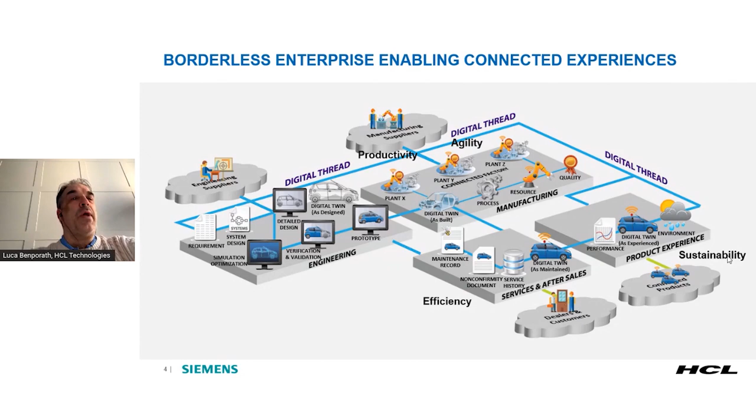When we deep dive into the engineering, there is one additional challenge: to have a full convergence between three main components of a product, which are the mechanical engineering, the software engineering, and electric design. All these three have typically been managed in silos, and our aim is really to start the convergence because, of course, one product has different viewpoints.

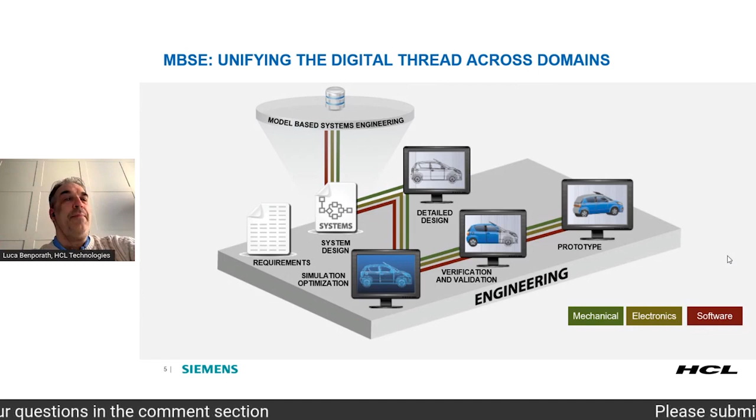And what you will see during this webinar is how in HCL we concretely help our customers move into that consolidation and harmonization with the right mix of competences, software, IP solutions, and best practices that are helping our customers go for this convergence of software, electronics, and mechanical. If we move to the next slide. So this was really the high-level picture.

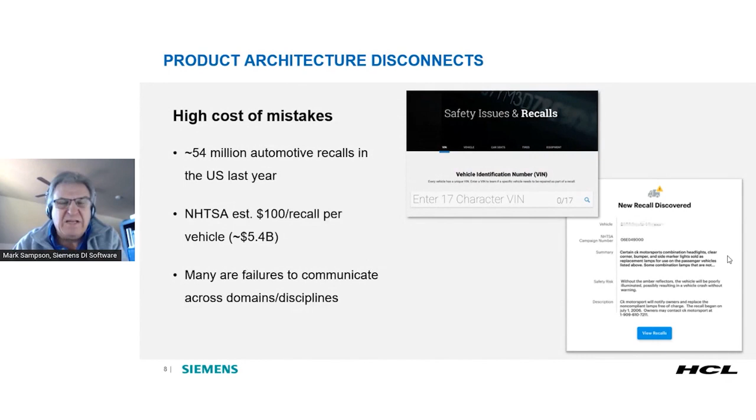Going on to the next slide. So what we're after here is this is a symptom of organizations and disciplines and complex system interactions that are all attempting to communicate in disconnected ways. So today, without this digital thread in your organization, the discipline boundaries and organizational boundaries create these barriers to communications that result in engineering problems across those boundaries.

For example, a requirement change on one side of the barrier isn't communicated to the other side, and so we have a problem. So the later we discover those lost communications, the more expensive it gets. But of course, you already know all this. In fact, you set aside half your program schedules in complex systems to deal with these kinds of integration problems. On the next slide, please.

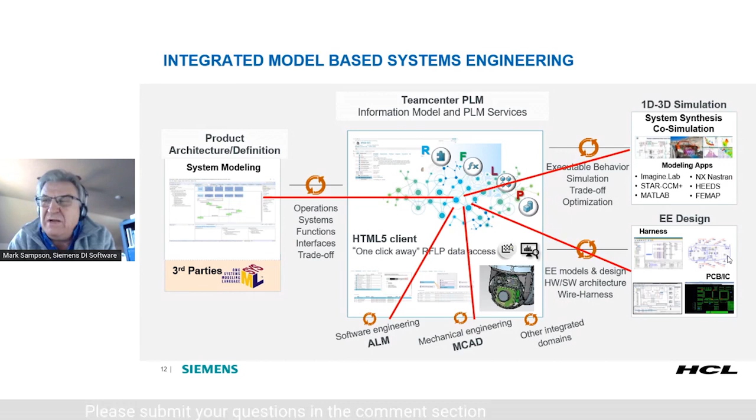Hello, this is Ambar Gadkari, and I'll walk you through some of the approaches that we have been developing on integrating MBSE with the rest of the product lifecycle.

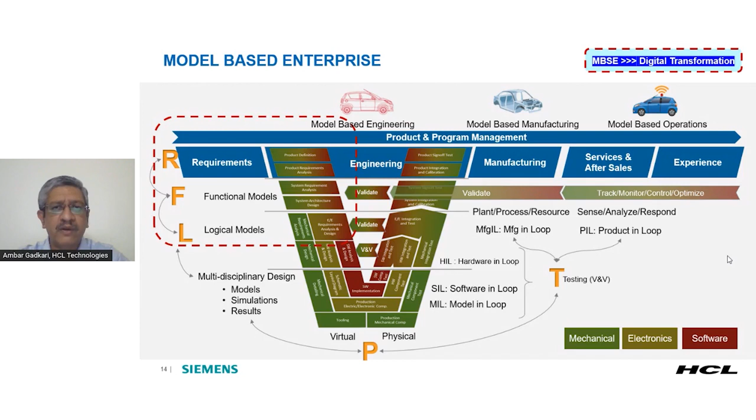So as mentioned by Luca and Mark, modern products as well as the product development lifecycle are getting more and more multidisciplinary in nature. By multidisciplinary, we mean a very tight integration of software with the electronics and the electrical and the mechanical parts that are inherently there in modern products, including cars and aeroplanes and many other

products. As you can see in this picture, there is not just one single V cycle in the engineering development activities, but multiple Vs being worked on in parallel. So the approach of MBSE or model-based systems engineering, which is applied at the top left-hand side corner of the V, is the approach being adopted by most organizations in handling the complexities introduced by the multidisciplinary nature of engineering processes.

It all starts with requirements, gets down into the functional, logical breakdown of the requirements, and then continues to the detailed design and the physical implementation of the systems. And then the traceability also continues in the various testing activities on the right-hand side of the V, as you can see. The need is also arising to create traceability not just in the engineering silo, but going beyond engineering into manufacturing and even aftermarket. And that is all met by bringing in the model-based nature in the engineering and development processes right at the beginning at the requirements level.

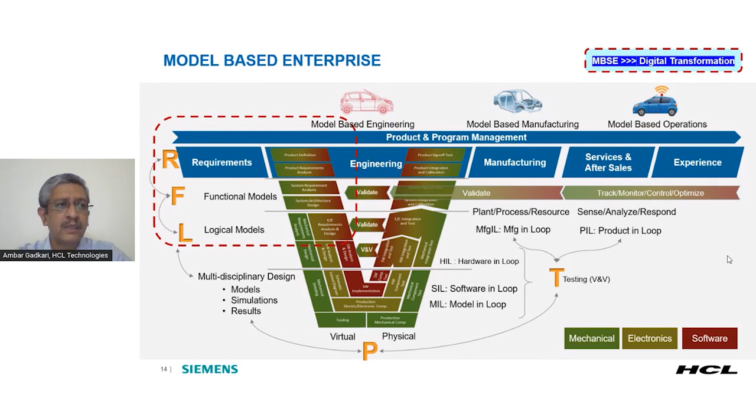Going to the next slide. So let's look at how this is achieved. As you might be aware, many of the engineering processes, be it mechanical or electrical or electronics, have their lifecycle or workflows handled by product lifecycle management or PLM tools, while the software, which is a newer entity in this entire product development, is handled by application lifecycle management or ALM tools.

So PLM and ALM together cover most of the activities related to the design, development, and testing of these products. However, bringing in the model-based approach at the requirements level requires bringing in MBSE at an early stage, before the detailed design activities start. And that's where newer tools like Cameo Systems Modeler and Rhapsody are being looked at, and systems modeling languages like SysML are being adopted very rapidly.

And the need seen by the industry is how do we create seamless workflows so that MBSE tools and processes get adopted in the mainstream product development lifecycle seamlessly. And that is what we will talk about in the next few minutes of this webinar. We can go to the next slide, please.

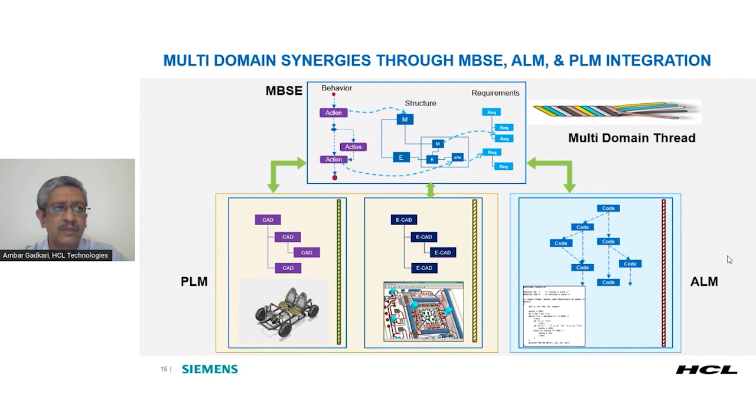At HCL, we have this dedicated R&D unit, which we call the Systems and Software Lifecycle Management COE, or in short, SysLM COE, which focuses on developing solutions for integrations across ALM, PLM, and MBSE tools. Through our 360-degree partnerships with various tool vendors, we have been able to develop various solutions, and one of them, which you see on the screen, is MODEX. MODEX is short for Model Exchange Solution. It is a data exchange solution for system modeling activities carried out as part of the MBSE block that you see there.

MODEX comprises not only the connectors, but also consulting and services associated with them. It uses pre-built tool-to-tool connectors for connecting MBSE tools with the various product lifecycle tools, such as requirements management tools and detailed design tools. This is required in realizing various use cases, such as automatically importing requirements from requirements management tools, like ALM or PLM tools, into the SysML format. That is one kind of use case handled by MODEX.

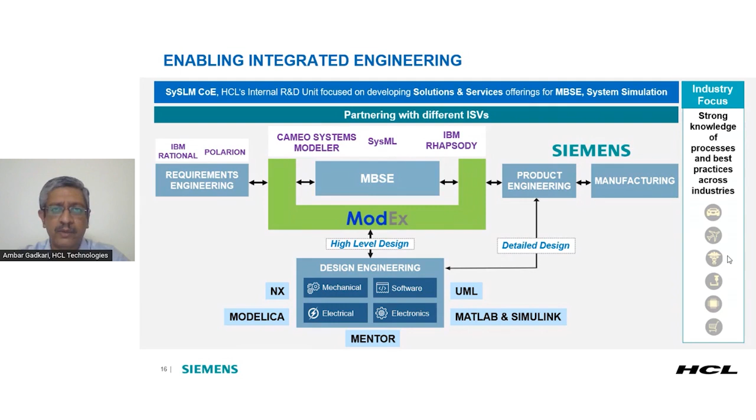So over to you, Hemant. Please, you can take over. Thank you.

Yeah, thanks, Ambar. So, as Ambar talked about integration of MBSE and PLM, as a part of HCL's offering of ModEx, we developed a connector to integrate Cameo Systems Modeler with Teamcenter. This solution is developed in partnership with Dassault Systèmes and Siemens. This connector delivers the capability to integrate system modeling data and artifacts from Cameo with Team Center, ensuring the downstream connectivity of data and bidirectional traceability across these tools.

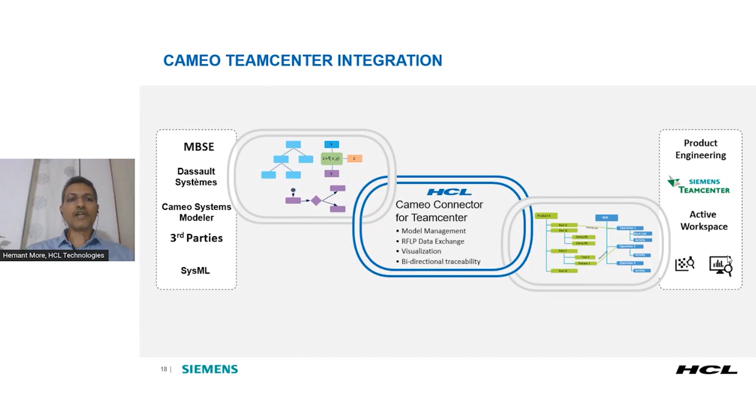In the next slide, I will talk about some of the capabilities and features of this connector and also show you a small demonstration. Can you move to the next slide, please? Yeah. So this integration, which is already available in the market, supports some of the major use cases. I will explain them briefly here, and then we can see them in the demonstration.

One of the key use cases is model management. This is about sharing the system model with Team Center and saving it in the Team Center repository, performing change management operations like check-in, check-out, revise, and other similar operations. This is not only the file, but we can store diagrams as images so that users can get the system information in downstream workflows.

The next use case is requirement integration, which is about exporting them to Team Center and using them in the PLM domain. At the same time, users can drag and drop some of the requirements from Team Center to the appropriate location on the project model in Cameo. During these operations, the SysML model is created as per the default mapping. Most of the primary types are supported using this default mapping. The next key use case is bidirectional data synchronization between Cameo and Team Center, keeping the traceability throughout the life cycle of the product.

Josh is the system architect. His role is to understand the requirements and formulate the system architecture using an MBSE tool. His team of system engineers, David and Sarah, works on further granularizing the MBSE specifications using a suitable methodology. Josh has chosen Cameo Systems Modeler to develop the adaptive cruise control system using SysML.

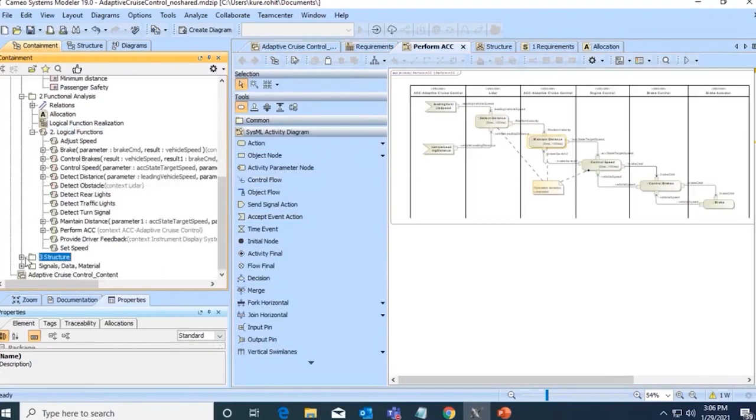The top-down method of system modeling begins with mission requirements, high-level functional decomposition, and logical modeling, ensuring traceability with appropriate relationships, for example, satisfy, allocation, refine. This model is shared with David by exporting it to Teamcenter.

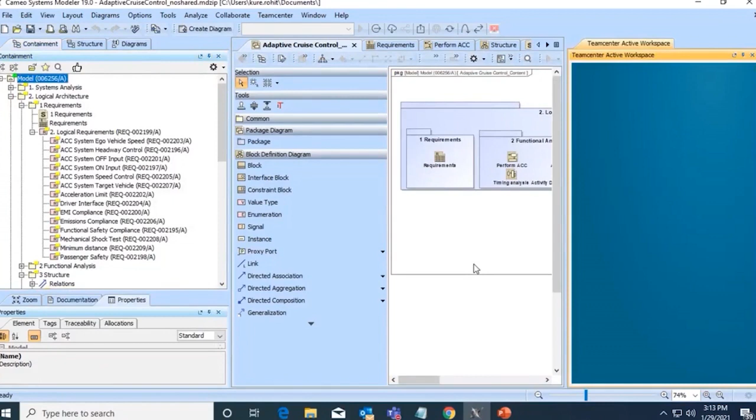On successful export, the ACC model is transported to Teamcenter objects as per predefined mapping rules. The corresponding Teamcenter ID and revision properties are updated on Cameo model elements for Teamcenter model management. The feature of visualizing this model in the embedded Active Workspace will help in quick review of model elements transported to Teamcenter.

David imports this model and performs further modifications to add more details. He first revises this model from the Cameo UI to incorporate modifications. By using a drag and drop feature, David brings the newly added requirements for obstruction detection from Teamcenter to Cameo. David creates a new camera block to satisfy the new requirement of obstruction detection.

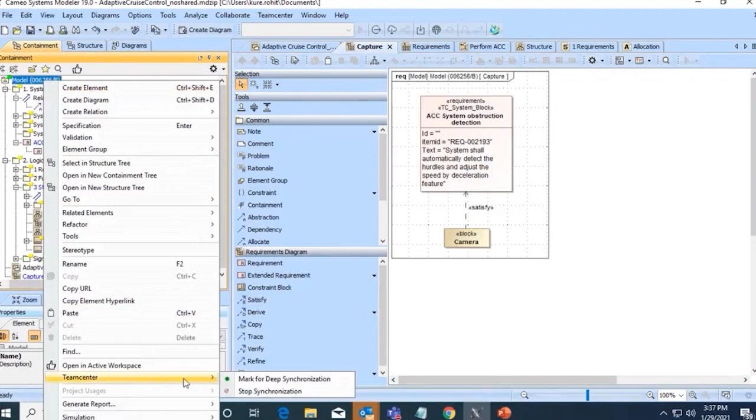Once his modifications are complete, he quickly publishes this back to Teamcenter using the selective synchronization option. He checks in this model to make it available for Sarah to implement her design details. Sarah verifies the changes by David in the Active Workspace web client. However, Sarah also wants to merge her offline work. She uses the sync and merge feature to push her modifications to the SysML model.

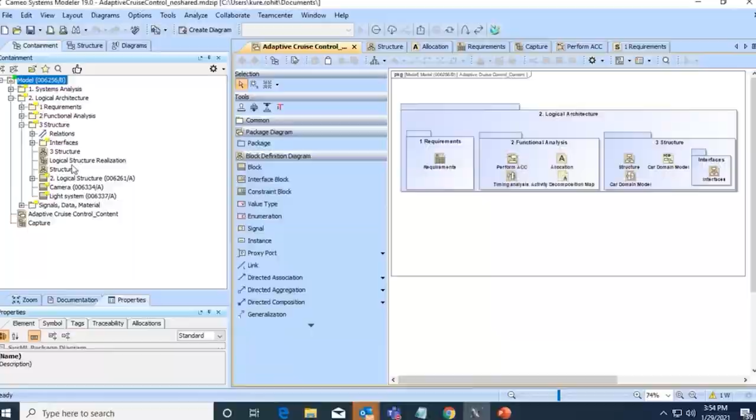HCL's Cameo Teamcenter connector solution also provides nice-to-have features to execute directly from the Cameo UI, such as compare revision and switching to other revisions. These features improve the user experience by eliminating switching between applications. The connector solution will truly help the industry take advantage of MBSE by connecting it with PLM and subsequent downstream engineering design silos.

Yeah, can you go to the next slide?

So as we have seen, this connector is very useful in the integrated product development environment. This connector enables teams to collaborate and understand the impact of their design early in the product lifecycle. It also minimizes unnecessary rework. Users can reuse the product requirements and system model, expedite complex product design decisions, and reduce the overall time to market for the product.